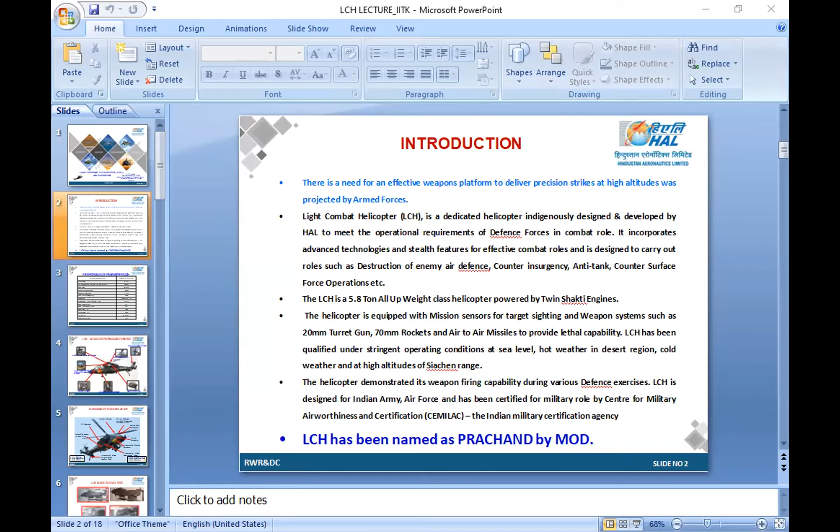Sir, I'll request you to make the slides full screen. Okay, right now it is still in normal view. By pressing the F5 button, maybe. Is it okay, sir? Probably it is still not yet full screen. Okay, so maybe you have to place the slide and then make it full screen. Give me a few seconds please. First, don't put normal view. F5 button normally makes it full screen. Still not here. Maybe I think the reason could be, I would say, stop sharing and share the full screen. Maybe you have chosen an application, so that may be the problem. You can stop sharing and then share when the option is there, select full screen. Please give me a moment. Please go ahead, take your time.

Yeah, please continue, sir. Now it is working fine.

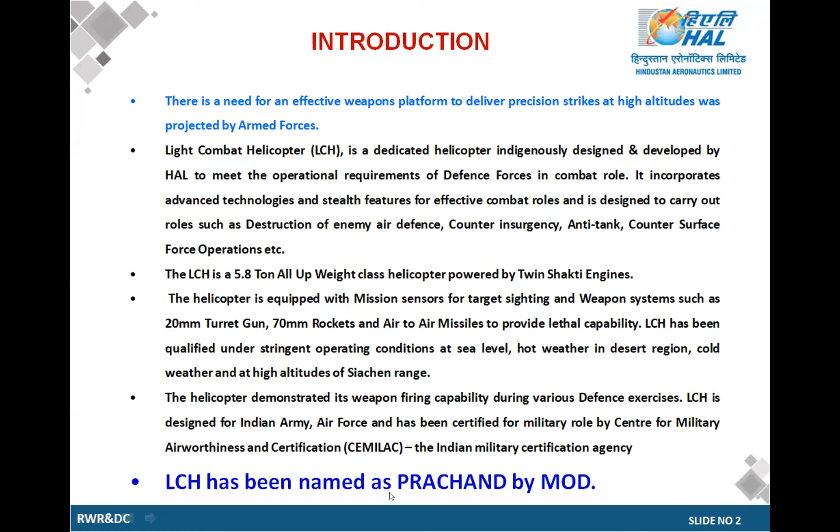You are muted, sir, you have to unmute. I think you are still muted, I cannot hear you. Screen sharing is coming out fine, please unmute yourself. Yes, the audio is back, so please start, sir. Could you see the video, sir? Yes, sir, now it is fine. Please continue, sorry for the interruption in the beginning due to some computer issues.

Once again, good afternoon to all the participants. I will explain how this LCH came into picture, taking you back to maybe 2009 or 2010. I will give a brief introduction about LCH. In the beginning, there was a need for an effective weapon platform to deliver precision strikes at high altitude, as projected by the armed forces. The armed forces indicated that India should develop such a weapon platform, and from there the concept of LCH was initiated.

Briefly speaking, the Light Combat Helicopter is a dedicated attack helicopter, indigenously designed and developed by HAL to meet the operational requirements of defense forces in a combat role, because earlier India had no indigenously designed combat helicopters. LCH incorporates advanced technologies and stealth features for effective combat roles, and is designed to carry out roles such as destruction of enemy air defense, counter-insurgency, anti-tank, and counter-surface force operations. The LCH is a 5.8-ton all-up-weight class helicopter powered by two Shakti engines.

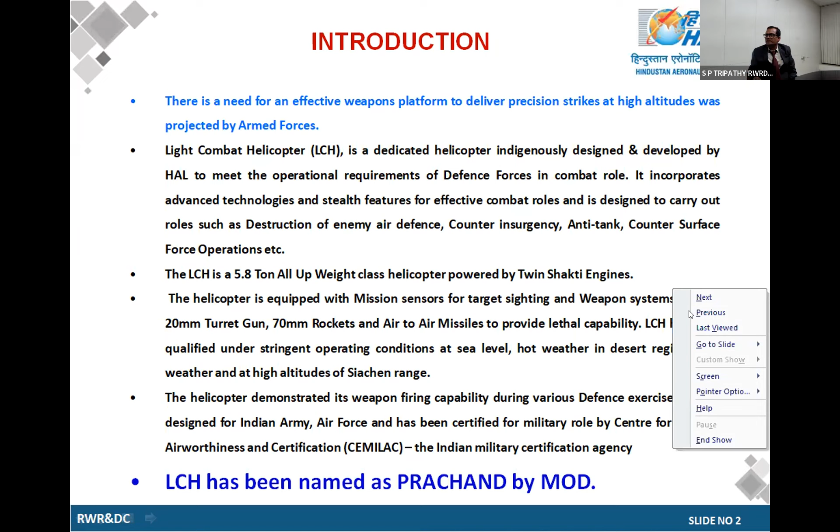Now I will show you the performance parameters of LCH. If you search Google or look at the LCH performance parameters in the public domain, you will see that LCH has a service ceiling of 6.5 kilometers, a ferry range at sea level with full internal fuel of 580 kilometers, a hover ceiling up to 5 kilometers, and a maximum weapon load of around 1000 kg. It has an endurance of 3.5 hours, maximum takeoff weight of 5.8 tons, and is installed with two Ardiden 1H1 engines rated at 1032 kilowatts. It can fly at a max dive speed of 337 kmph, a max cruise speed of 270 kmph, and can hover up to an altitude of 5000 meters.

At the last, it has a G limit, load factor they call. It is at plus 3G and negative 0.5G. Once again, the endurance is 3 hours 45 minutes.

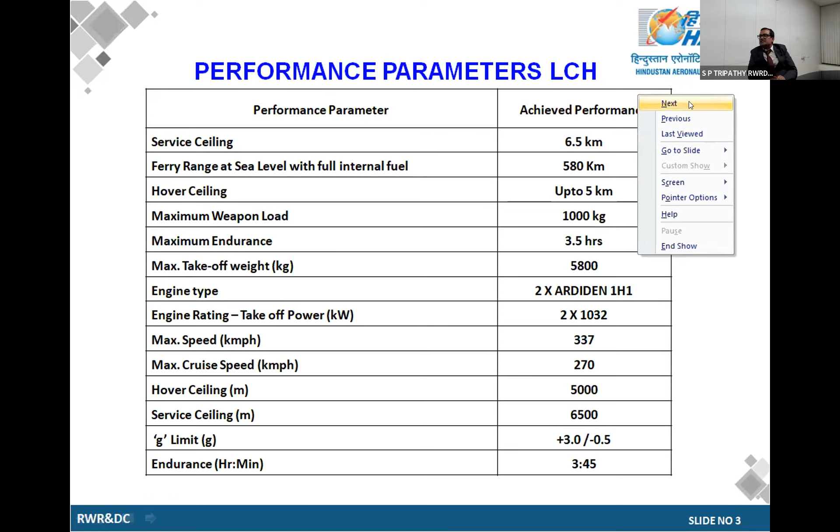Then how these parameters came? When somebody thinks these parameters are now live, everybody could see that the parameters are there for LCH. Then how did we derive, how did we obtain these numbers? Before proceeding to that, I will give a brief introduction on the LCH advanced technology features.

If you look at the picture of LCH, it has an integrated dynamic system. It has a hingeless main rotor, bearingless tail rotor. It is powered with the Shakti engine, as I told you a few minutes back. It has a crash-worthy crew seat and a glass cockpit. In addition, it has an anti-resonance vibration isolation system, which we call ARIS.

It is there on the advanced light helicopter also. The same has been implemented on LCH.

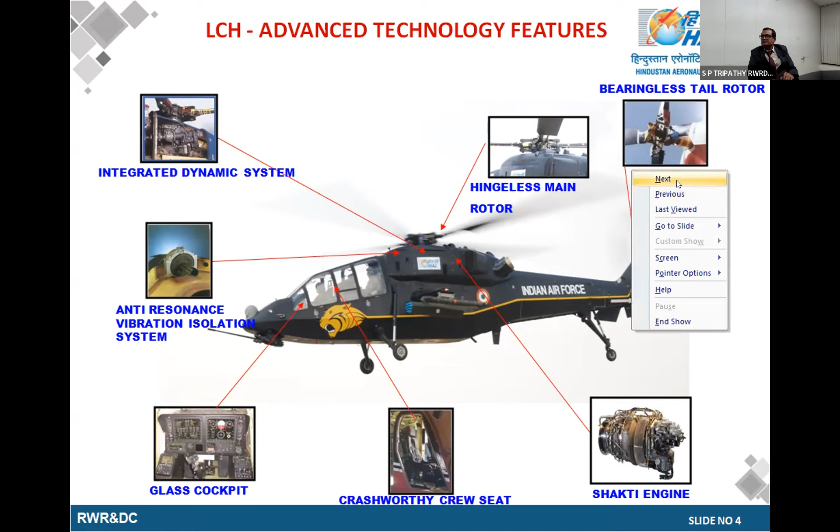Then what are the survivability features of LCH? LCH is integrated with a nuclear detector, meaning it can detect nuclear weapons. It has a narrow fuselage and flat glass panels to reduce glint, then a bulletproof windshield to keep away from attack.

Then it has armor protection. Generally for all attack helicopters, all combat helicopters, they have armor protection. Then a crash-worthy bottom structure is there for any emergency or hard landing. Then a crash-worthy fixed tricycle wheel landing gear is there.

It has canted flat panels for low radar cross section, called RCS. It has dual channel FADEC, dual electric power, dual lube pump, twin engine, dual hydraulics, dual AFCS.

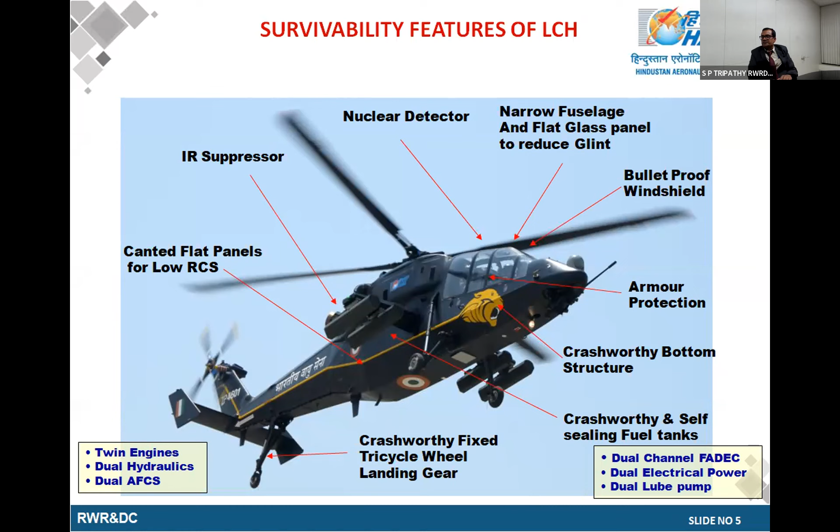Now I will take you back to 2009. So how it happened: today a single LCH is flying, it is getting inducted into Indian Army, Indian Air Force. Then how did the story start?

So initially, from the drawing board, we started designing the helicopter. We did further work, as you can see in the picture, like wind tunnel testing. We carried out the LCH wind tunnel testing in our wind tunnel.

Somebody may ask, what is all this testing for? I want to check that whatever design I have done over the surface of the helicopter, or the surface of the model, what forces are being developed, what moments are created, and what the pressure values are. This gives insight into whether the design can comply with the missions or not. So from the wind tunnel setup, we carried out dedicated testing.

The testing comprises testing the helicopter at different angles of attack, different azimuths, meaning at different azimuths in the alpha and beta directions. Then we did hover testing, accumulating all the data over the entire surface with respect to force, moment, and pressure coefficients, which are all aerodynamic coefficients.

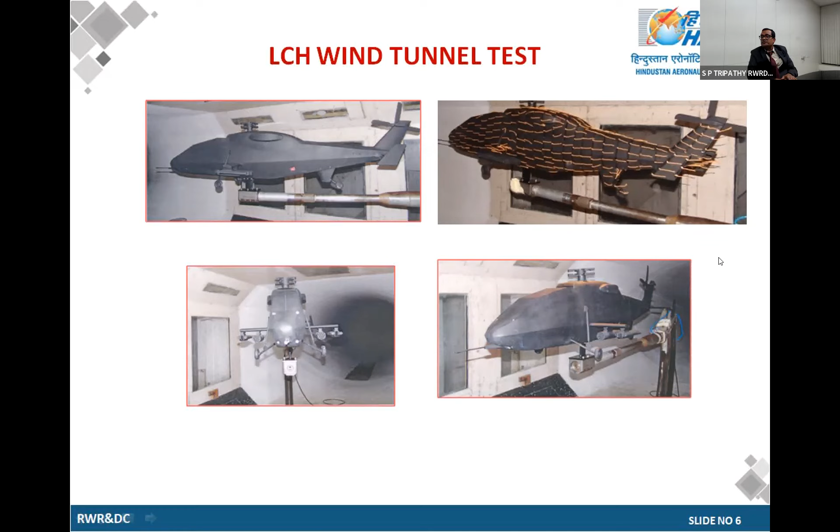These give me some idea of what lift can be generated by every control surface, and the moments give an idea of the handling quality of the helicopter. The pressure coefficients measured give an idea of what loads will be absorbed by the components when it is in the flying zone.

Suppose a pilot needs to ingress or egress easily or not - those things, and how a pilot will visualize the cockpit. For that purpose, we developed the full scale mock-up.

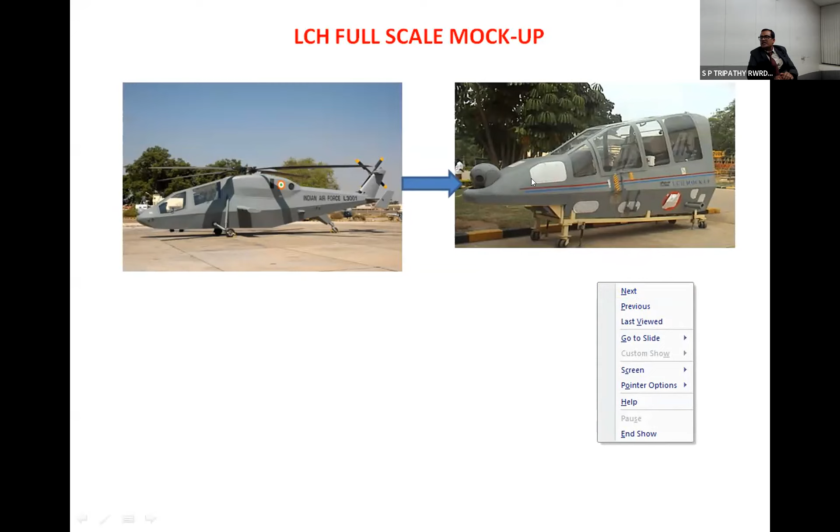Subsequently, based on feedback from the pilots and from the certification agencies, we tried to modify it. Then you can see it was converted to one more mock-up having all the features, which is just like a replica of the actual helicopter. You can see that in the beginning we don't have an EO pod. If you see a dome-shaped structure, it indicates that is the electro-optic pod, and you can see all the glass panels. It just looks like a helicopter.

It is capable of operating from sea level up to the service ceiling, that is 6,500 meters. It has forward airfield operation capability, and can fly up to 270 kmph at sea level in external store configuration.

That means I can integrate external stores like a missile or rocket, and the helicopter will still be able to fly at 270 kmph. It can also do forward flight.

Suppose an engine failure occurs, the helicopter can continue flying in forward flight in case of engine failure up to 4,000 meters. These are very, very stringent requirements for a helicopter.

In case of adverse wind conditions, as in India where many places have very stringent wind conditions, you may get wind speeds from different directions, including crosswinds. So we have to test the helicopter and ensure it can take off or land in adverse wind conditions up to 30 knots. These are the capabilities of this helicopter.

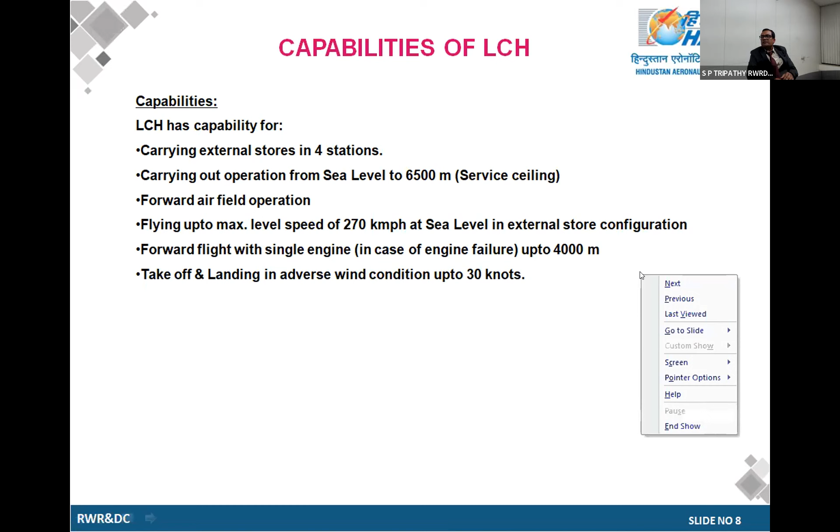This slide gives insight into when we started testing. Once the mock-up was ready, the helicopter was built with all accessories like main rotor, tail rotor, engine, and cockpit. Then the first flight happened on 29th March 2010.

Subsequently, we manufactured one more prototype called technology demonstrator 2, which made its first flight on 28 June 2011. Then we made technology demonstrator 3, which came on 12th November 2014. Then the fourth technology demonstrator flew for the first time on 1st December 2015.

Why these 4 prototypes? Someone may ask, why not just test on the first prototype? When I flew the first prototype, I came to know the missions asked by the customer, whether it can comply with those missions, what difficulties were there, what observations were there, and whether the helicopter is flyable at all these stringent conditions or not.

From that, I would get some insight on whether there is any requirement to modify a component or modify any external configuration of the helicopter so it can comply with the missions. Then technology demonstrator 2 comes, then technology demonstrator 3 comes, based on further improvements required as raised by the customer.

Then it comes to TD4, technology demonstrator 4, which is just a replica of the production helicopter. It shows how a production helicopter looks, like a production SOP - they call it standard of preparation. It is a production SOP helicopter.

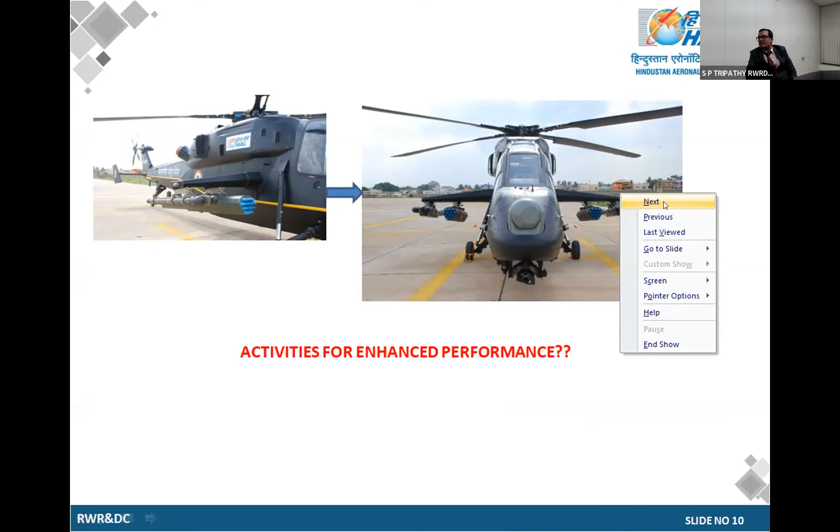So what have I done? When I want to enhance performance, there are 3 to 4 things I have to incorporate without touching the internal integrated systems of the helicopter. If I have to do aerodynamic improvements, I have to do it only on the external configurations, because nobody will allow me to touch the electrical sensors, avionics sensors, transmission system, or engine system, everything already integrated. So the only thing allowed is external modifications to get better aerodynamic performance. So I started studying.

Look at the first point, it is called the aerodynamic armament wing. Earlier I had a box type armament wing, so I changed it to the aerodynamic armament wing. Our group did a dedicated study on which aerofoil would fit the helicopter, how the armament wing carrying the weapons can sustain that load, and in addition give major lift and unload the main rotor. Both mathematical computation and CFD studies were done. We derived the armament wing shape after almost 5 to 6 months of study, then it was integrated with the helicopter.

Subsequently, our team started searching for other modifications that could be done on the helicopter to improve performance. Improving performance indirectly means improving the aerodynamics of the helicopter, that is, reducing drag so the helicopter can fly at a faster speed. So my team did a dedicated study, looking into every corner of the helicopter to see what external changes could be made.

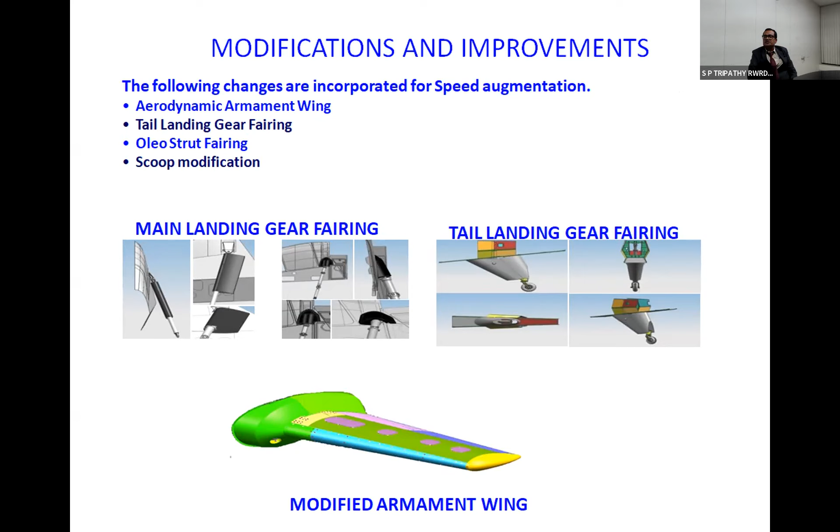Then on the scoops, which are kept for inlet and outlet cooling of components inside the engine compartment and gearbox area, we started studying how the scoops could be modified to reduce drag. Scoops are required for improved performance of the engine and transmission systems, so we made a good modification over the top cowling so that the drag area could be reduced and we could get better performance.

Then you can see there is a pitot probe location. Initially we put the pitot probe to measure airflow—it gives total pressure and static pressure, from which I derive dynamic pressure to check the actual speed the helicopter is flying. When the helicopter started moving faster, to acquire data properly without error or tolerance differences, we did studies with CFD and theoretical computations, and modified the pitot probe location so it could capture the actual speed of the helicopter with minimum error. On the right side of the screen, those modifications are shown, and we were able to get accurate speed readings in every flight regime. That is also a modification we have done.

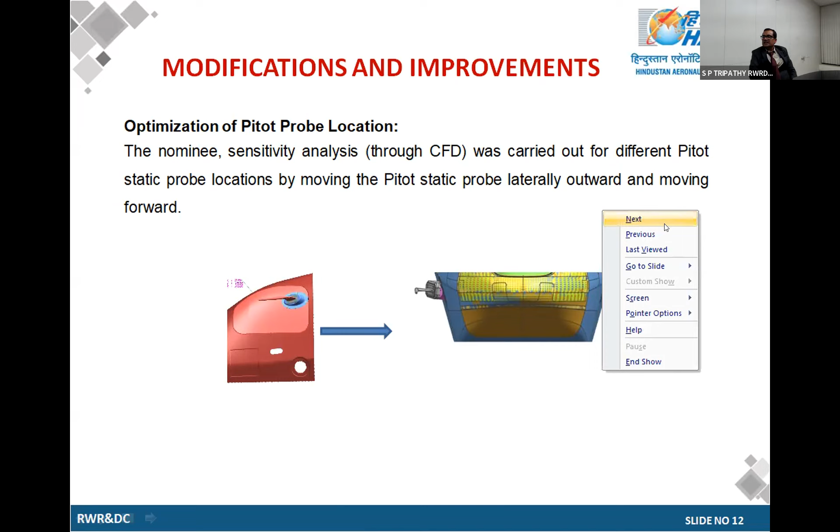When we completed these two modifications, it gave us the technology demonstrator 2. Now next comes the optimization of the engine air intake, because the air intake implemented on the helicopter, when delivered to the customer, requires integration of the infrared suppressor system, called IRSS. When you integrate the IRSS on the helicopter, you have to provide a secondary air intake, just behind the normal intake.

So towards that also we have done studies. Those two things are not there in the technical demonstrator 2. So we have done a dedicated study on how to improve the air intake performance.

Generally, what will happen if you design a better air intake? It will give reduced installation losses, which can give a better engine performance. So in that regard, my team has done a dedicated study, and we have improvised the air intake.

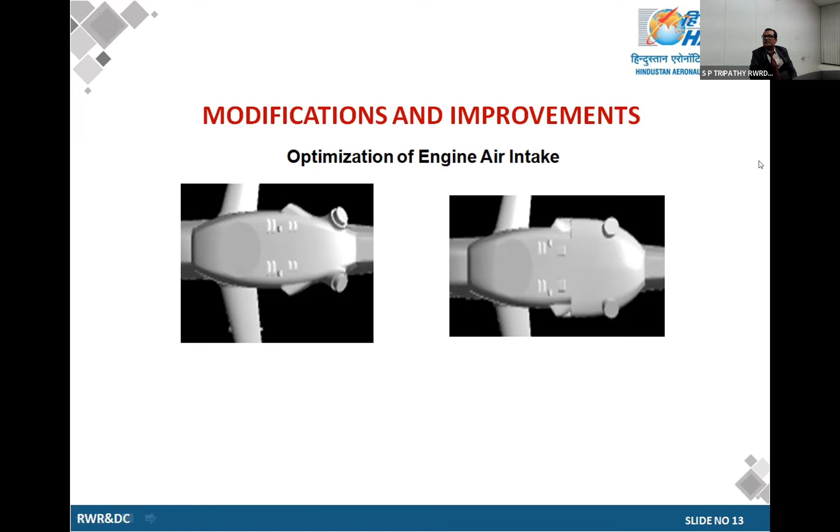So that the engine performance can be enhanced, and helicopters can fly with reduced losses at a faster speed at all altitudes. From the left side of the figure, you can see that contour. On the right side, all the modifications have been carried out and integrated into the helicopter in the technical demonstrator 2.

Now comes to this. So now all the prototypes are available. Now what is there? How to comply with the missions, whatever has been asked by the customers. That means whatever has been raised, that if your helicopter should be able to comply with these missions, it should be able to fly at different altitudes and different speeds.

It should be able to take up a certain maximum altitude. It should be able to give me good low speed handling capability. It should give me very faster acceleration. So to demonstrate all these things, I have to subject the helicopter to different types of trials.

Because finally I have to tell, when the helicopter is delivered to the customer, really what will happen to the component load, what will happen to the life of the component. Then third one, I have to assess the helicopter performance encompassing the entire flight envelope. As you have seen in my flash slide, helicopter service ceiling has been envisaged at 6,500 meters. That means I have to do the test up to 6,500 meters and check that this helicopter is able to withstand the speed or the component loads at different altitudes or not.

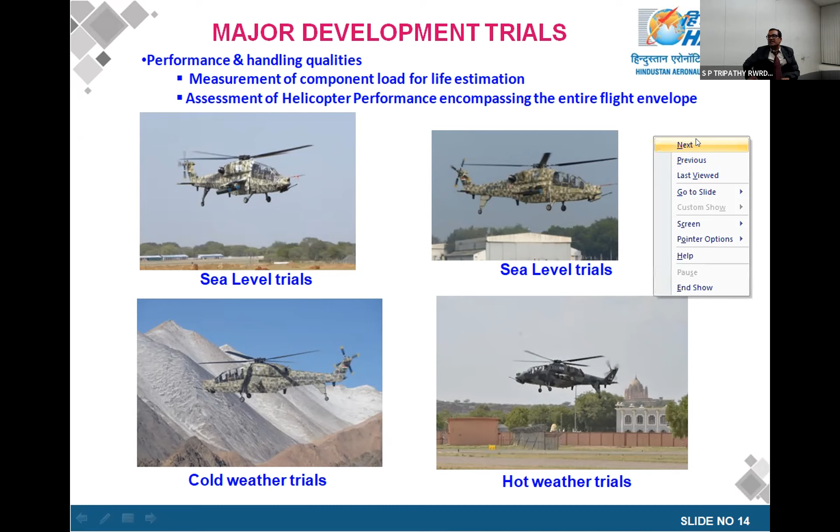That means the four slides you are seeing give an idea of how the helicopter behaves from cold to hot, and at a lower altitude, if the helicopter is flying at a very fast speed, how is its behavior. Those details have been obtained out of all these tests.

Subsequently, on the left side, there is a major achievement for LCH, and for the country also, I can tell you, it is called the hot and high altitude trials. That means you have to fly the helicopter in hot conditions and at high altitude.

That means, if you go to Leh Ladakh in India, you have to go in August and September and wait for the temperature to build up. Though Leh Ladakh is at an altitude of 3000 to 3500 meters, the temperature in August and September goes to almost 25 degrees, which is closer to ISA plus 30 conditions with respect to international standard atmosphere.

So you have to do the test and check what the payload capability is. Finally, the customer will be utilizing the helicopter in all temperature conditions. I have demonstrated cold weather capability, but I have to demonstrate hot and high altitude also to check its capability.

When we went for the trials, we covered all the bases and checked the capability. During the process, there was also a major achievement for HAL and for LCH. We landed at a helipad where no helicopter had ever landed till now, at 4,700 meters.

When I myself was there during the trials, we monitored the helicopter's behavior, and it could land there with adequate fuel and payload at that altitude, then take off again and get back to the Leh sector.

On the right side, you can see the rocket firing trials. Once you establish the performance parameters of the helicopter, meaning you have defined that your helicopter is capable of flying at the required speed and altitude, and the loads are well within the expected values and component capability, then the helicopter is ready for the firing trials.

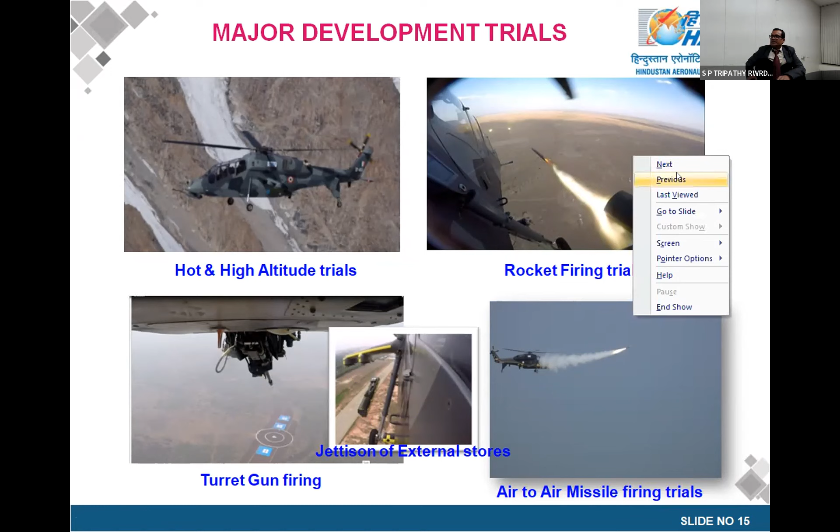So this is with respect to different trials. Now, as I explained, in hot weather conditions in Jodhpur, the left side picture has shown that LCH has the capability to take up a max allowed load of 5,800 kg beyond 40 degrees centigrade. We have even tested up to 43, 44 degrees centigrade. Absolutely no issue, we are just waiting for the temperature to come.

It is a fast attack helicopter. On the right side of the picture, you can see it is the first attack helicopter in India to land and take off at 4,500 meter altitude with considerable loads of weapons and fuel. This is a major achievement for HAL and for the country, because till now, whatever information we have in the public domain, nobody can tell you that except LCH, any other helicopter can land and take off at altitudes beyond 4,500 meters with a load of weapons and fuel. This is the achievement for LCH, and in addition, for HAL also.

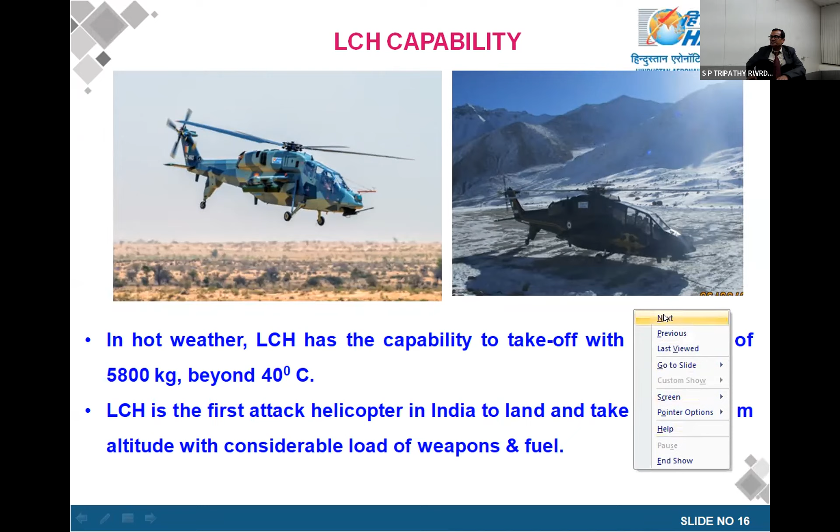These are the features. It is a dedicated combat helicopter. I have shown you the 3 helicopters, all our prototypes. It is a dedicated combat helicopter with a sleek fuselage, tandem seating with pilots back to back, designed for high survivability, with stealth features. Armor panels have been integrated, and it has anti-armor capabilities.

It operates during day and night. We have tested the helicopter during day and night. Night flights have been carried out so that the helicopter is compatible for day and night operations. Even firing trials we have carried out at night to check that the customer can do firing trials during day and night. So these things also have been carried out.

There is crash-worthy floor structure. Then reduced radar signature - extensive testing has been done at Jodhpur by a DRDO lab to check that it has a reduced radar signature for the enemy. Then reduced IR signature, because an IR suppressor has been integrated on the helicopter, so from the exhaust side you cannot locate the helicopter. In that regard, the IR suppressor integrated on the helicopter gives it a reduced IR signature. Then we have directional control by push-pull cable.

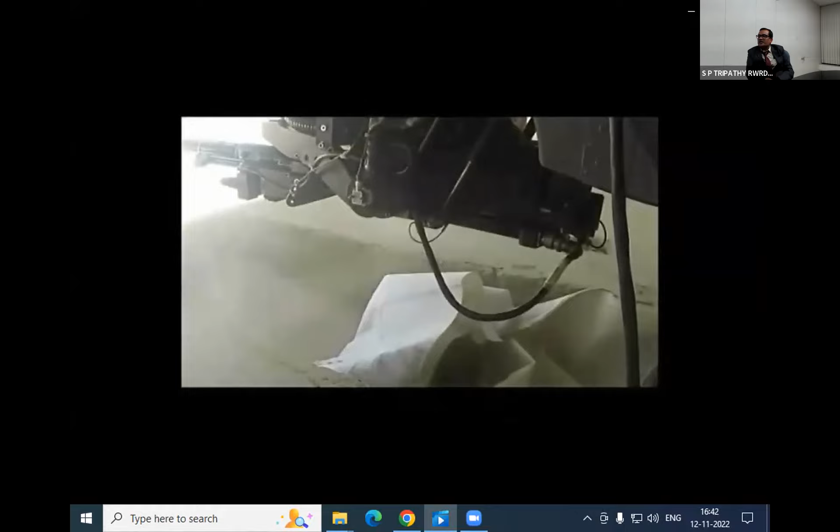Before proceeding for gun firing trials, we have to check on the ground to check the butt firing. Then there is the turret gun firing trials we have carried out at Kalaikunda in West Bengal. This is just to check the location before carrying out the firing.

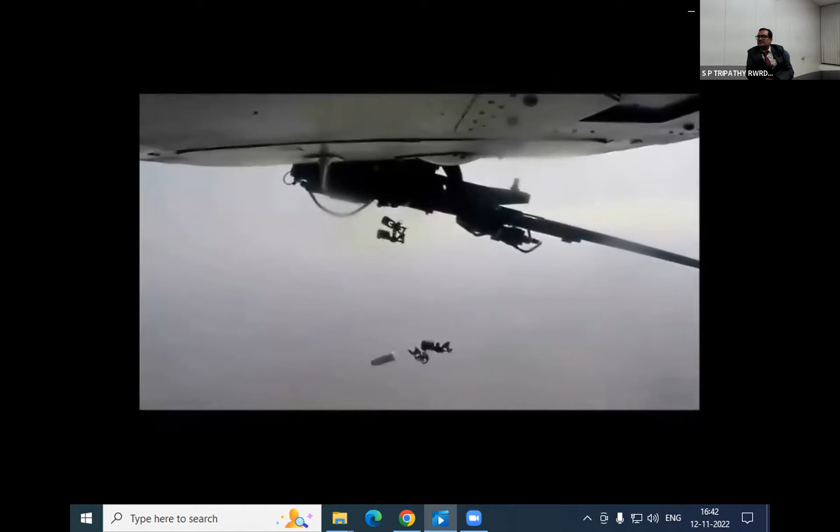Go to the screen, go to the screen. Normal screen.

Yes, sir, I think I have finished the presentation. That was a really amazing and very nice presentation, really enriching to see the journey of light combat helicopters.

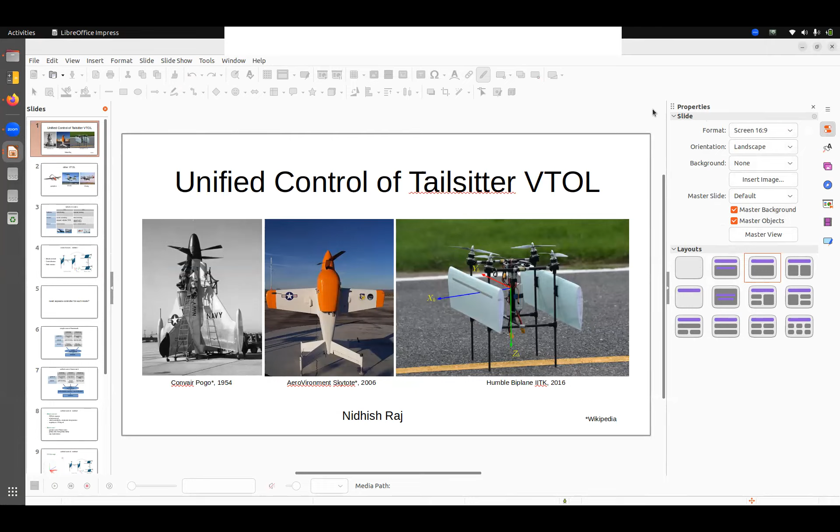Can you see my screen now? Yes, it is visible. You can make it full screen. Okay, maybe I have to stop presenting and then make it full screen. Just give me a second. Sure, no, go ahead and take your time. I think the screen you shared was showing the whole screen, so maybe once you go to slideshow mode it will show up. Okay, got it. Can you see it now? Yes. Okay.

So I have agreed to talk on this topic of unified control for Tailsitter VTOL. I couldn't put too many slides for this talk, so please feel free to ask questions if you have any.

Here are some Tailsitter aircrafts. As the name suggests, they take off and land on their tail. Here are a few examples: first the Convair Pogo, one of the first Tailsitter aircrafts, which made its first flight in 1954. It took off, did the back transition, and landed. Then there's another one from AeroVironment in 2006. And then this humble biplane quadrotor, which was part of my thesis, developed back in 2016 in the IIT Kanpur Aerospace Department.

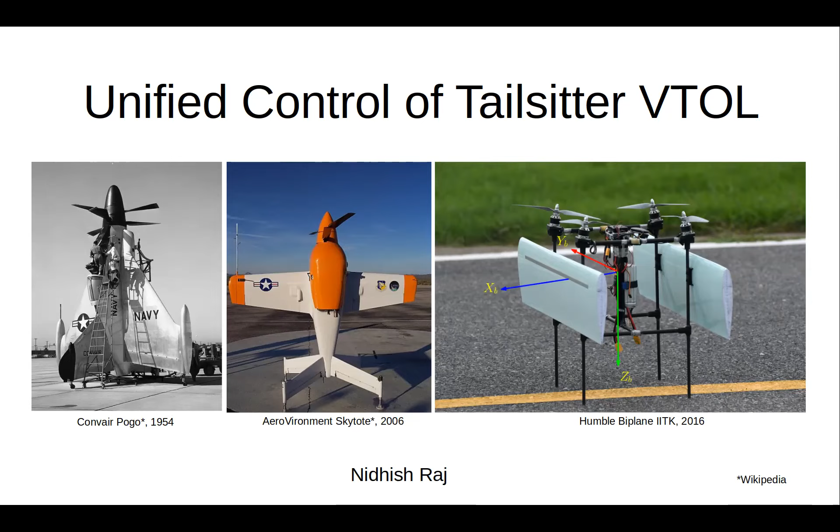The only problem with this kind of configuration is that you always have to carry these extra motors and propellers, which is useless for most of the mission, because you take off and land, that's when you use these. For most of the mission, I would say 95% of the time, you are not using these motors. So that is one big disadvantage with this configuration, which is why people prefer other configurations like tailsitter, tilt rotor, or tilt wing.

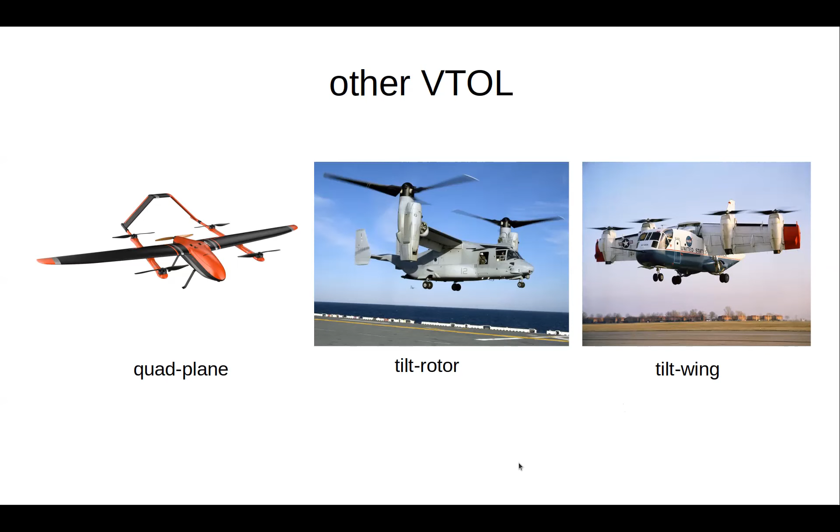So we know that tailsitters have got these two modes. In fact, all VTOL aircraft, convertible aircraft, have got two modes: fixed wing mode and rotary wing mode. Fixed wing mode does normal cruise and flies like a fixed wing aircraft. It's much more efficient in this mode for traveling longer distances, and even for a given payload, this is supposed to consume less power. Then you have rotary wing mode, which is used for takeoff and landing. And this is the configuration.

These individual modes have different methods of control, and they are very different. So you cannot have just one controller wherein you can control the entire aircraft. You need two conventional controllers whenever you design a tailsitter, a tilt rotor, a tilt wing, or even a quad plane, because in quad plane it's much simpler, as they are completely independent and decoupled, unless you are in the transition regime wherein you go from hovering mode to fixed wing mode and vice versa.

From the point of view of guidance, they are different. Fixed wing and rotary wing modes are different in the sense that aircraft can only do path following. They cannot do trajectory tracking. Trajectory is a path, a time parameterized path, so there is also a time parameter associated with a path. A path is just an XYZ coordinate.

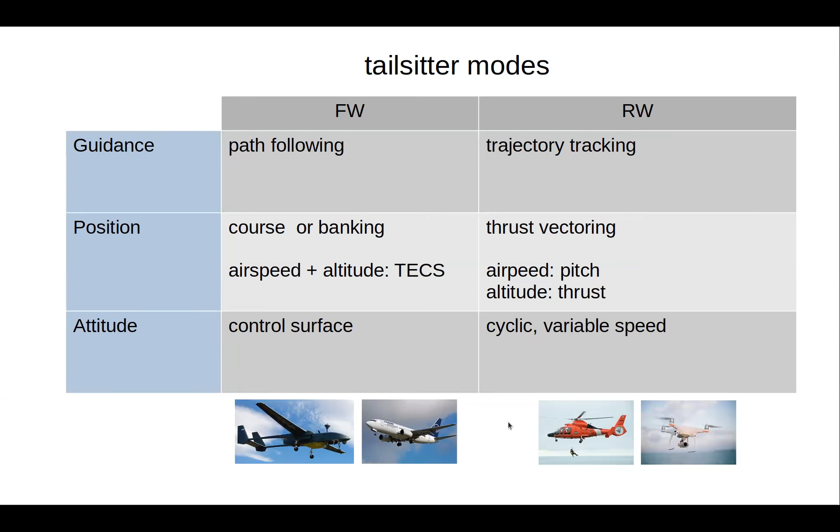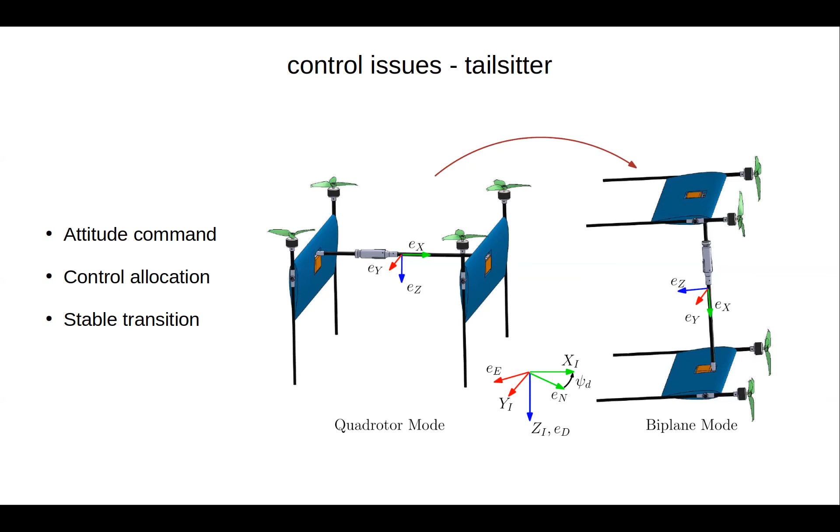So these are the 3 issues that you face when dealing with tailsitters. Let's see if we can simplify these issues and find an elegant solution to solve all of them together. That is why I made the title of this talk Unified Control for Tailsitter. So do we need separate controllers for each mode? Yes, we need separate controllers, but only up to a point - we only need separate controllers up to position control. For attitude control, you can have a simplified unified controller, which is going to solve all 3 issues that were mentioned in the previous slide.

So how does a simple control framework look like? For example, in the open source autopilots that you find, you will find that they have two different modes, and then they somehow try to switch the modes from multi-rotor to fixed wing under certain conditions, and they have state machines for switching this mode.

And this happens only after the attitude controller. It doesn't happen before the attitude controller. And this particular method has several issues. For example, if you are switching from multi-rotor to fixed wing mode after a certain speed, this could lead to actuator discontinuities, which can also sometimes excite some of the frequencies of the aircraft, if you're considering larger tail sitters and all. So this can be a problem.

And also this doesn't seem to be a very elegant solution, because a lot of code needs to be written in order to accomplish the switch from one mode to another mode. If you go through the code, you will understand it's fairly complicated, and all this because you are using a very simplified approach, a simple switch kind of mechanism to accomplish the transition or to control the entire tail sitter during the two modes of operation.

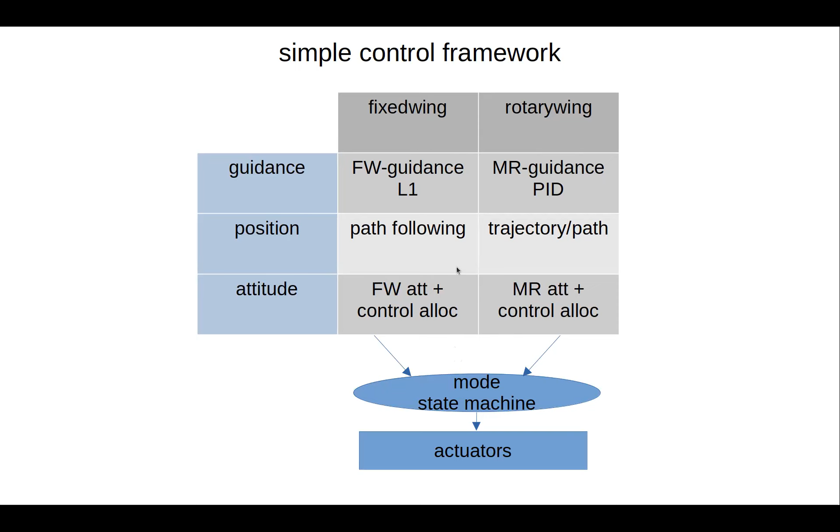So how do you accomplish this unified control method? So there are two key steps in order to accomplish that. First is with regard to attitude command. So how do you give command to a tailsitter so that you can use the same command in both quadrotor mode as well as fixed wing mode?

So for that, you need a 3-1-2 Euler sequence as an attitude command instead of 3-2-1, because in aerospace applications, especially in airplane and fixed wing applications, we use 3-2-1 Euler sequence all the time. Or let's say you are not doing large angle maneuvers, then you can use 3-1-2 Euler angles for control of attitude. You can also use it for specifying the attitude and also use it for feedback purposes. So your entire controller can be given in terms of 3-1-2 Euler angle sequence.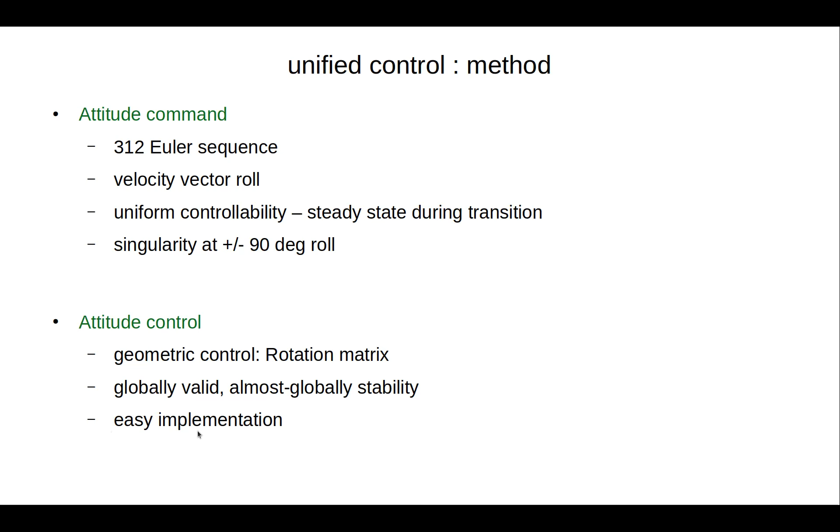So this is what I was mentioning earlier about what roll means when you use the 3-1-2 Euler sequence. Here is your initial body frame: x-axis, y-axis, z-axis. Let's say you pitch by some angle, say 30 degrees. This is your new pitch, shown as this red line. If you try to roll the aircraft, you can see that this angle is maintained — so it is more like a cone. The trajectory of the body frame x-axis is like a cone.

If this is your horizontal initial x-axis, and you are doing the transition along this line in this direction, the velocity vector will be in this direction. You can see that as the aircraft is rolled, the angle of attack is maintained because this cone angle is maintained. So this is the preferred way, I would say, to command the attitude while the tailsitter is transitioning.

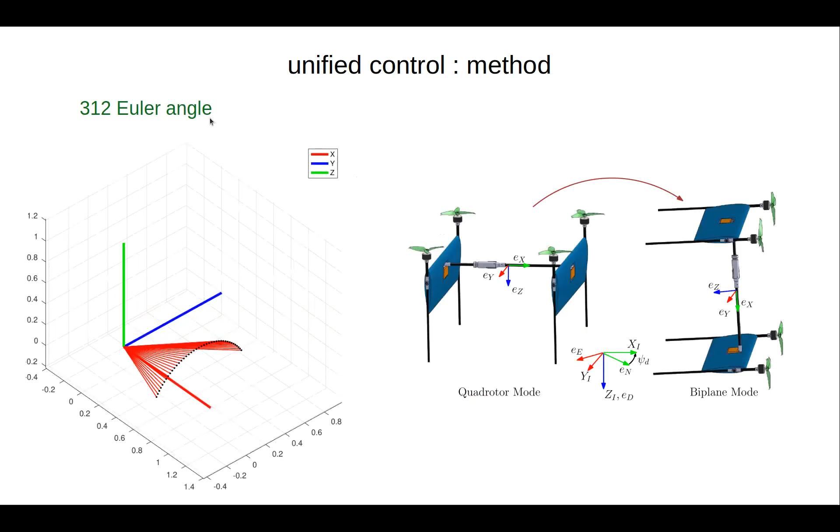So how do you do attitude control using rotation matrices? You need to define: R is the current orientation and omega is the body frame angular velocity. Similarly, RD is the desired attitude and omega D is the desired angular velocity. This RD comes from the 3-1-2 Euler sequence, which you define as a pilot command, and it can be converted into an equivalent rotation matrix. Omega D can also similarly be defined from the command. Once you get R, omega, RD, and omega D, you don't need any more information to do the feedback control.

You need to define an error rotation matrix, RD transpose R, and an error angular velocity, which is omega minus RE transpose omega D. With these two, using RE, you can define a rotation error vector ER. Here P can just be an identity matrix, or you can keep it as any positive definite matrix with different eigenvalues. With all these defined, it's possible to define the control moment that should act on the tailsitter in the body frame, like so.

And you can see this is entirely made of the above mentioned terms, ER, E omega, omega, R, RD, and omega D. And also there is J, which is the moment of inertia of the tail sitter. So with this, if you apply this control moment on the aircraft, all these properties are achieved.

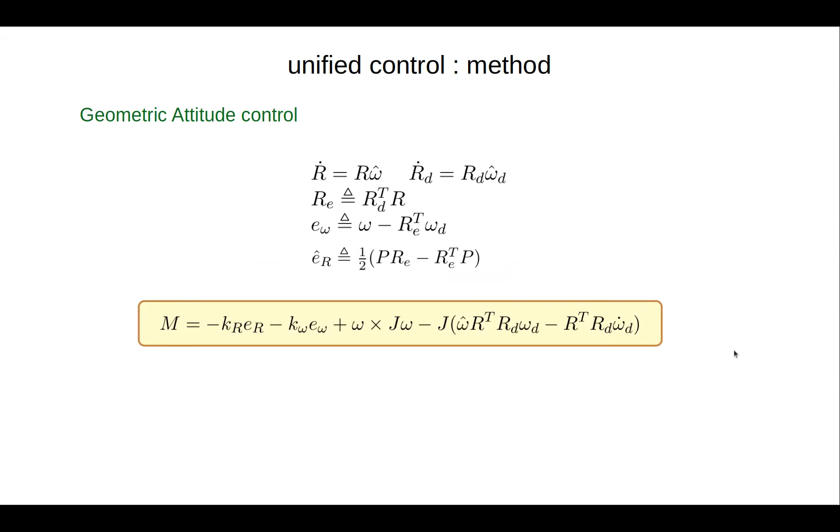And the software is very simple because if you are implementing this unified control approach, basically you need like 4 lines of code to implement it, and it's not very complicated. You can implement something like this even on very tiny microcontrollers with not so much computational power.

And another advantage is that, again, as I mentioned, the actuator control is continuous. There is no discontinuity anywhere, because you have one single attitude control throughout the flight maneuver. So in the next slide, I'm going to show you the video.

So this was done at the IIT Kanpur airstrip, and this flight was done manually. So you can see how easy it is to fly the tail sitter manually without any extra support, just using this technique of unified control.

So when you are saying that you can fly it at any attitude, sort of, that means that there are practically many trim points possible.

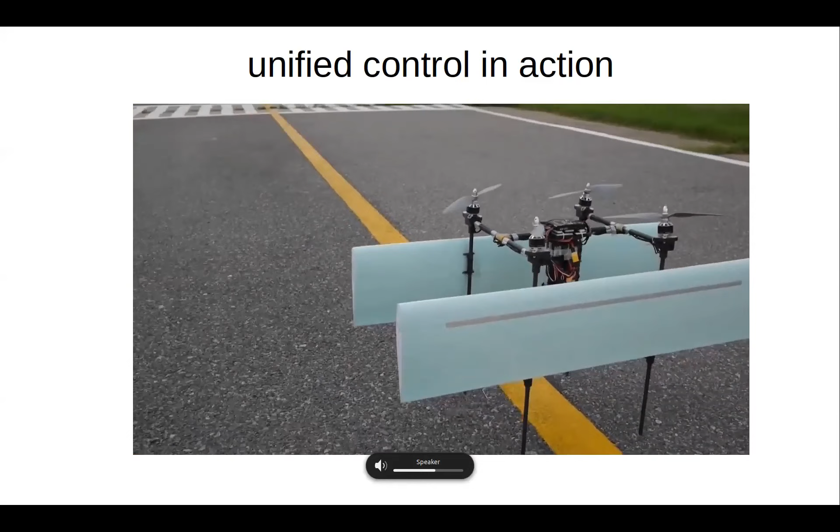Sorry, I couldn't hear you. So what I was saying is that, having a unified control, you can fly it at any attitude. Does it imply that the vehicle will actually have many trim positions? I can fly it at 90 degrees as a quad rotor, and can I fly it practically at any intermediate point between 90 degrees and 0 degrees? Yeah, it is possible.

Yeah, I have verified it with the biplane. Okay.

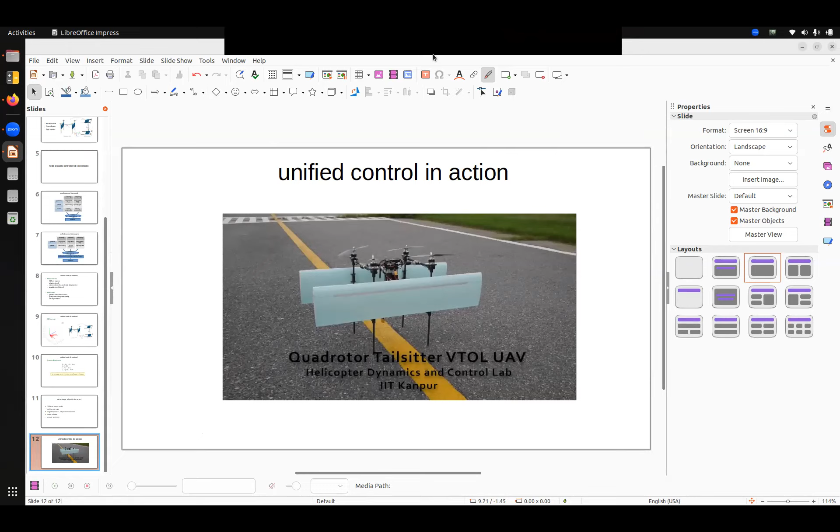Yeah, so I have a couple of questions. Like, for the tilt wing, like in V22 Osprey and all, we ideally are seeing that during the transition, there will be a slight drop in altitude. So is there any kind of issue that has arisen during the transition from rotary wing to biplane mode?

Yeah. So when you do the forward transition, usually there is not much change. So sometimes the altitude drops and sometimes it goes up. It depends on the wind actually. So for that, you will need some kind of feedback control plus feed forward control to fix that issue.

So we had done some work on that while I was at IIT Kanpur. There was a learning-based, iterative learning-based controller which was implemented. After which we were able to accomplish forward transition with less than 50 centimeter change in altitude. So yeah, you need to have some kind of control to avoid this kind of change in altitude.

And you will also see the largest change in altitude during back transition. What happens is that when you do the back transition, it goes up high a lot. The change in altitude is much larger compared to forward transition. So there also you could do some kind of feedback control plus feed forward control or learning based control to have a better transition.